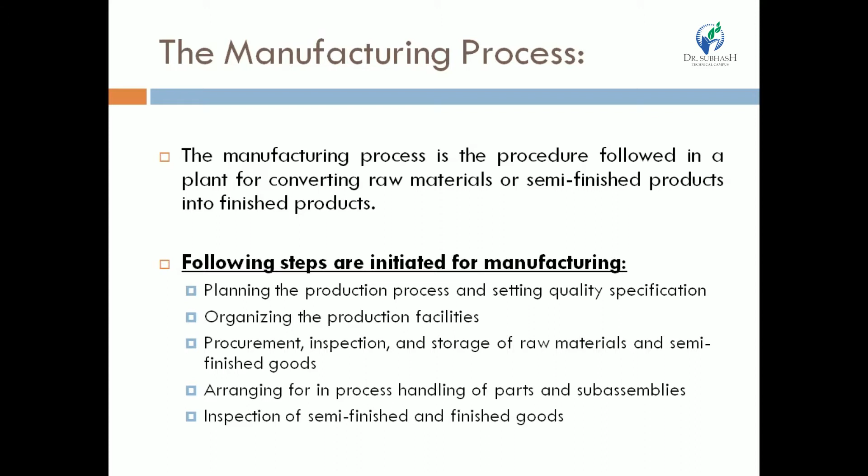Then arranging for in-process handling of parts and sub-assemblies or semi-finished products. We have to arrange and handle different parts, different assemblies, different semi-finished products, and use them to produce some product or job. Then inspection of the semi-finished and finished goods. These are the different steps which are initiated for the manufacturing.

Now see classification of the manufacturing processes, based on the function of the process. Based on the nature of work involved, this process may be divided into the following categories: which type of manufacturing process you want to use to manufacture the different product, depending on the type of work required and involved to produce that particular product.

First of all, we have to change the physical properties of the product, of the raw material. So this is one type of manufacturing process that we are performing to change the physical properties of the material.

Second one is the casting process. I hope you understand, or have studied previously, the casting process, which we are using to give shape and size to the workpiece.

Next is the primary metal working process. If you want to remove some metal or material from the workpiece or semi-finished product, then we are performing some metal working processes, called primary metal working processes. For example, if we have raw material as a round bar with diameter of 30 mm, and we want the actual job diameter of 20 mm, then we have to finish the raw material into the actual workpiece by removing some metal or material, which is known as primary metal working processes.

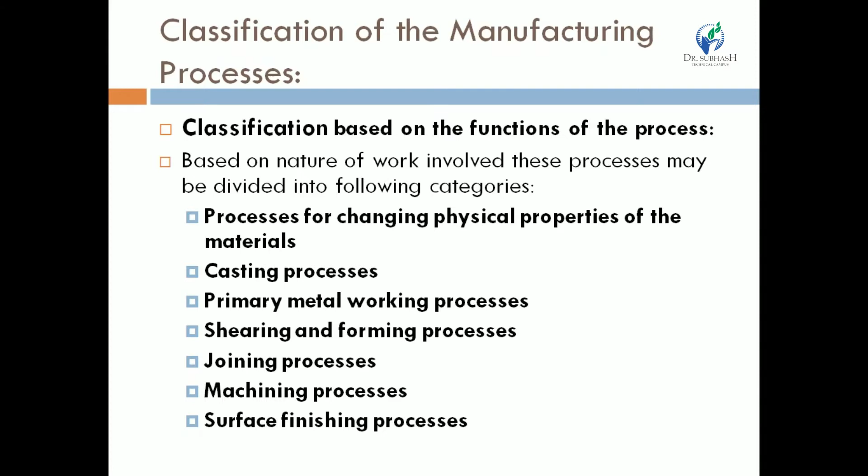Now, first of all, let us discuss process number 1: processes for changing the physical properties of the material.

Physical properties of the material can be changed by the heat treatment process. Heat treatment is one of the best methods for changing the properties of most metals. Metal, I am not talking about wood, I am talking about metal.

So these are the common heat treatment processes used in industries for changing the physical properties of the metal or materials. I hope all of you know about these heat treatments: hardening, tempering, annealing, and surface hardening.

Annealing we can further classify into 4 different categories: full annealing, normalizing, process annealing, and stress relief annealing. So these are the different heat treatment processes. As per the requirements, which type of metal or material you want to change the physical properties of, on that basis we select different types of heat treatment processes.

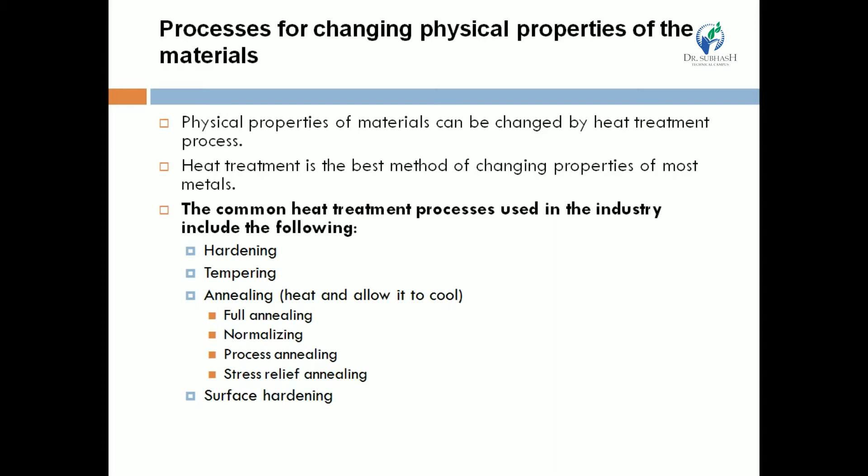Now, second process, that is casting. So what is casting? Casting or founding process involves the forming of objects by filling prepared molds with the molten material and allowing this material to solidify.

Depending upon the material to be cast, the number of castings to be produced, the size and intricacy of the casting, and the surface and dimensional accuracy desired, the casting process may be of any of the following kinds: sand casting, permanent mold casting, die casting, centrifugal casting, etc.

Precision casting includes plaster molding, investment casting, and shell molding. So we use a casting process for the purpose of filling prepared molds with molten material, which is also allowed to solidify in the casting process.

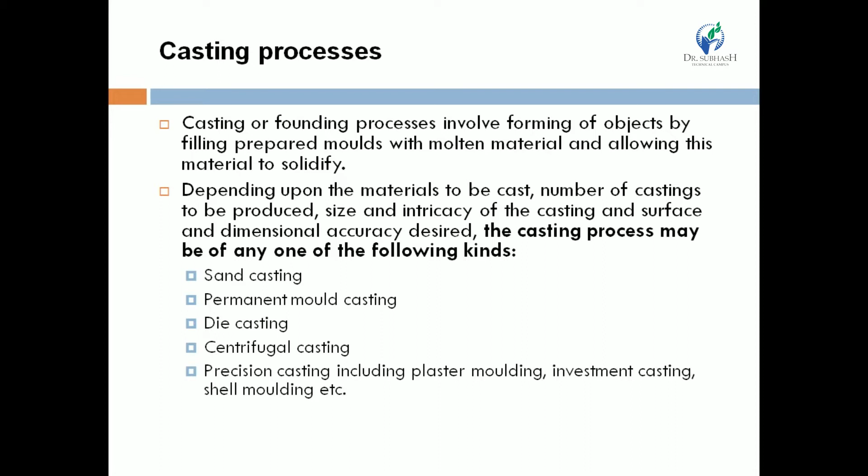So we can say that this type of process is used to give shape and size to the workpiece, depending on which type of work we want. So this is the casting process.

Now, primary metal working process, as we discussed in the first slide, this type of process produces what are known as wrought metals, which are important engineering materials because of their strength and toughness. Examples include structural I-beams, channels, angles, rails, tubes, pipes, etc.

Common primary metal working processes include metal rolling, cold drawing, pipe and tube manufacturing, forging, extrusion, etc. So before preparing the raw material for a particular product in industries, we have to perform this type of primary metal working process. Why?

To prepare the perfect raw material for the production of a particular product, job, workpiece, item, or component. Right? Primary metal working processes.

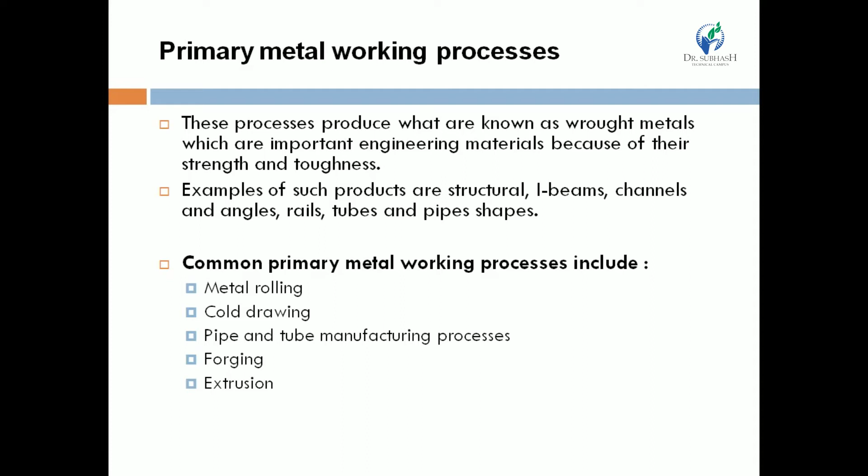Now, shearing and forming process. The machines and tools used in this process include shear, punch, die, presses, etc. The operations that make up this process may be classified as shearing, drawing, forming, stretching, etc. It is also one of the important portions of this manufacturing process.

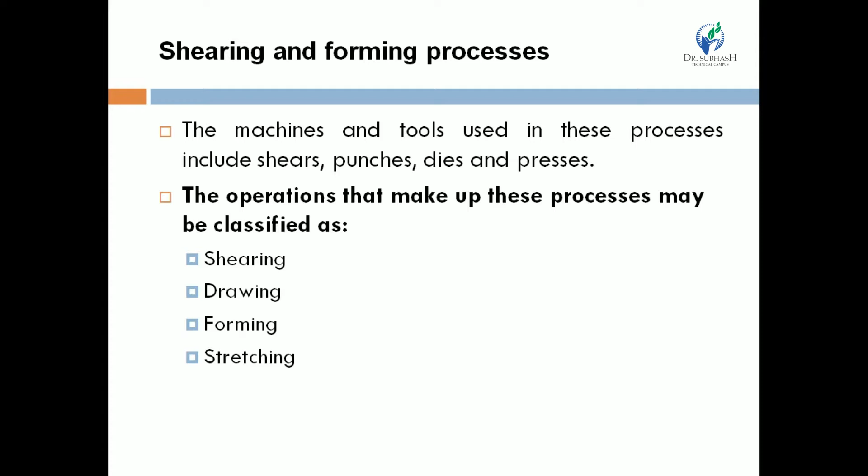Now, joining process, a very important manufacturing process, and in detail we will discuss it in chapter number 3. So joining process may be carried out for the fabrication of different equipment, for assembling components to make a functional unit, or for repair of broken parts.

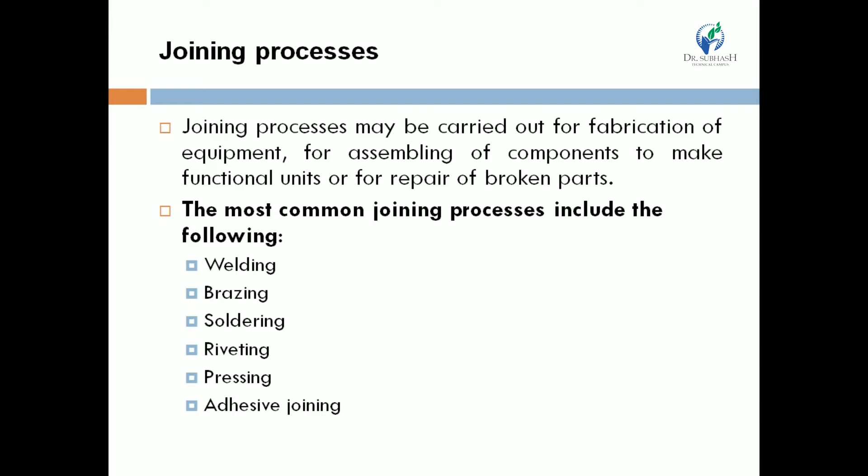So if you want to join broken parts again, then we have to perform different joining processes. The most common joining processes include the following, and I hope all of you have an idea regarding that: welding, brazing, soldering, riveting, pressing, and adhesive joining. These are the different joining processes.

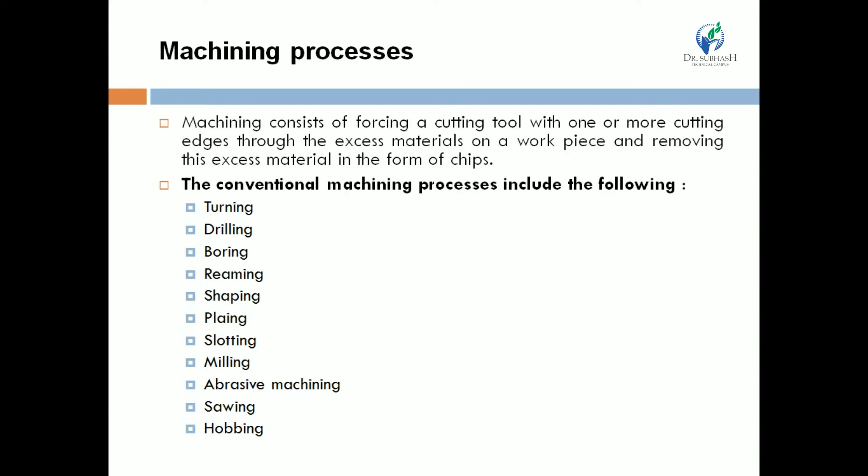The conventional machining processes include the following: turning, drilling, boring, reaming, shaping, planing, slotting, milling, abrasive machining, sawing, and hobbing. Many of these operations we already studied in manufacturing process. Now, surface finishing process.

As we discussed in the previous slide, this surface finishing process is very important, because after all other processes, we perform this surface finishing process. It is used to ensure a smooth surface, improve appearance, or provide a protective coating to the product.

So these are the listed finishing operations or surface finishing operations we can say. We can include polishing, honing, lapping, abrasive grinding, metal spraying, and electroplating, all these processes.

Abrasive grinding, that we perform in the manufacturing process with the use of the surface grinder or hand grinder, if you want to give good surface finishing with the use of these grinding operations.

Metal spraying, if we are spraying the metal on this particular product, then also we can give good surface finishing or shape and size.

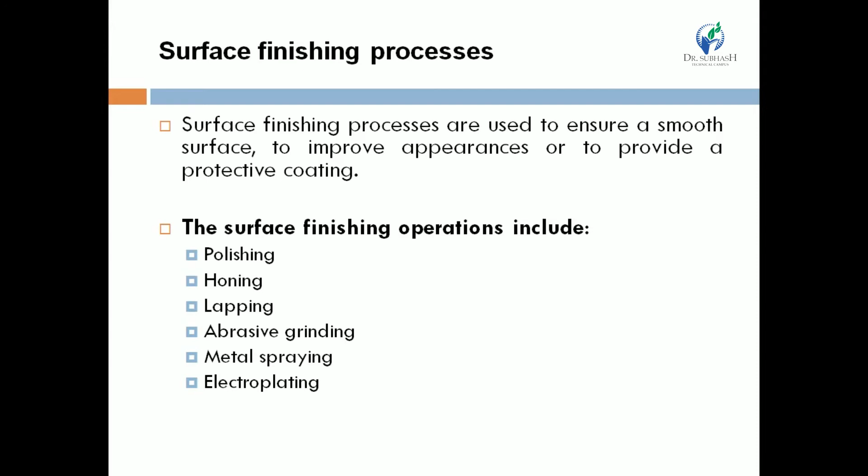Then classification of the manufacturing process on the basis of quantity of production. Based on the quantity to be produced, the manufacturing process can be divided into three categories.

Unit or piece production: if I want to produce only one piece of this particular product, item, component, or job, then it is called unit or piece production.

Batch or lot production: if I want to produce that particular product in some lots, a number of pieces, with the same material, same size, same shape, then it is called batch or lot production.

And the final one is mass production. If you want to produce that particular product or item in a large number of pieces, then it is called mass production.

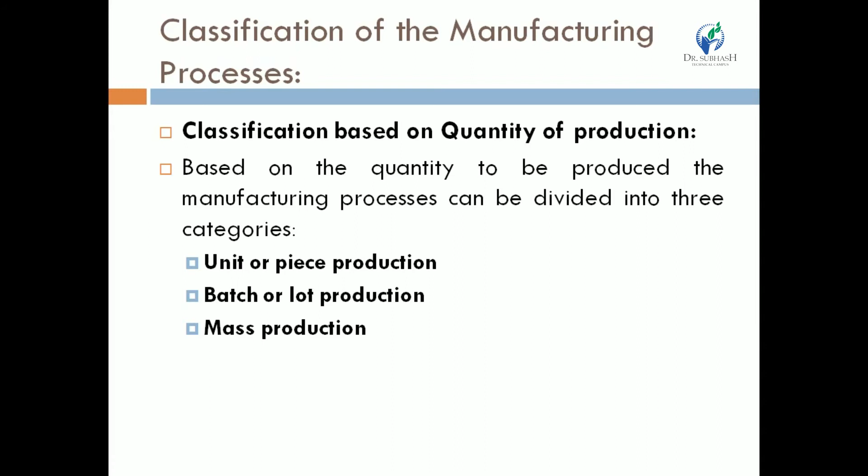Now some fundamental concepts. Interchangeability - what is interchangeability? The concept of interchangeability requires that each part or assembly going into the final product must be made to the definite size, shape and finish specifications. That is called interchangeability.

Simplification, standardization and specialization - this is also one of the most important concepts for the manufacturing process. If we want to produce some product or component, we have to find the way which is very simple, which also belongs to standardization. So the importance of the standard, and specialization.

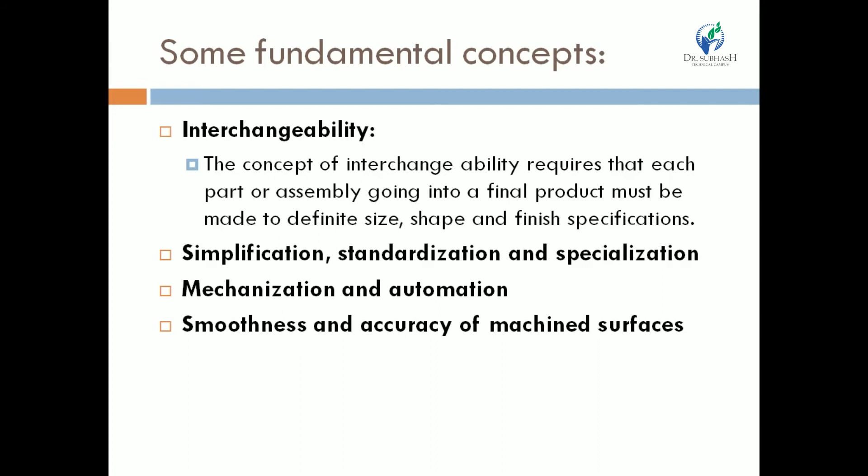Then mechanization and automation. What is mechanization? We are using mechanical energy manually. Automation means we can perform automatically. Smoothness and accuracy of the machined surfaces - that concept is also very important for manufacturing processes.

Now manufacturing cost - elements of the manufacturing cost. It has been pointed out earlier that in order to survive, every manufacturing organization must continuously strive to produce its product at the lowest cost and with a quality that meets the customer requirements.

So every organization is always thinking about how we can give the product to the customer at a cheaper price, and how we can satisfy the customer. What are the requirements of the customer in the current scenario? Which type of product do they want? On the basis of that, I select the different manufacturing process for this particular product.

The price paid by the customer for a commodity, called its selling price, is made up of several costs. These are generally grouped under three categories: cost of production or manufacturing cost, cost of distribution or sales expense, and the third one is profit, right?

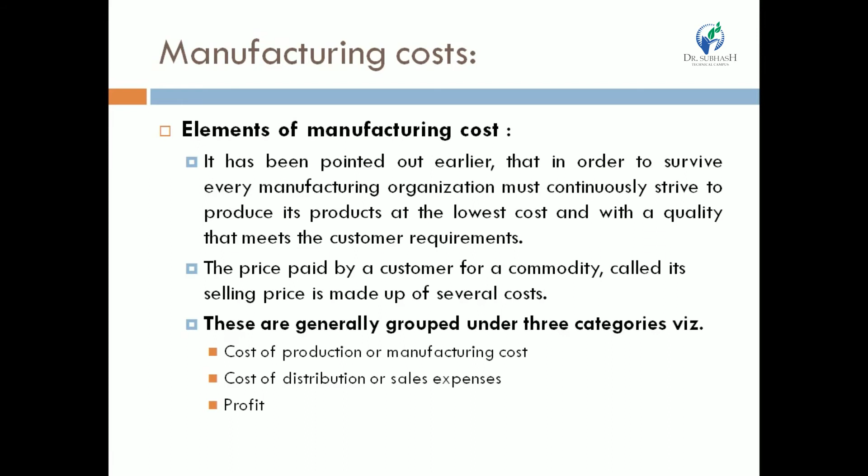So first, fixed and variable cost. What is fixed and what is variable? Another classification of cost is in terms of fixed and variable cost. Fixed costs are those costs which are independent of the quantity of product manufactured, and the total cost of a product is fixed cost plus variable cost. So what is fixed?

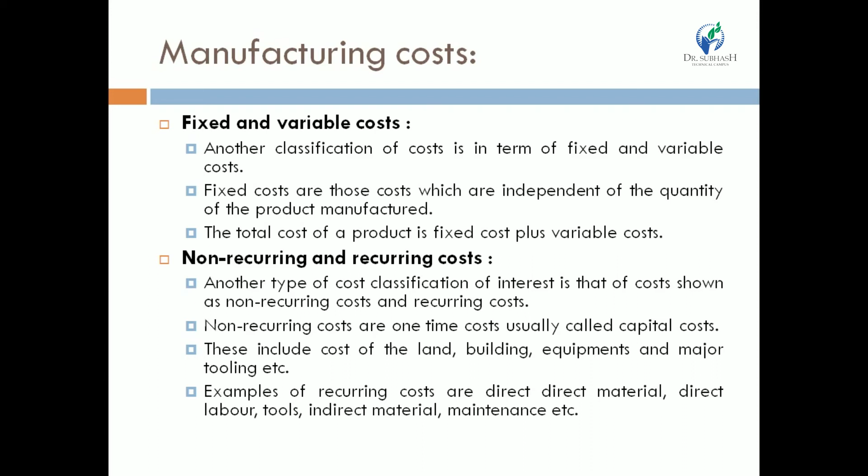Recurring, non-recurring. Which is non-recurring? Land cost, building cost, equipment cost, major tooling, etc. What is recurring? Material, labors, tools, indirect materials, maintenance, etc.

Incremental cost. The incremental analysis requires that the outcome of the alternative course of action be estimated in terms of the change in revenue in comparison to change the cost. The use of this incremental analysis requires the outcome of the alternative courses of action be estimated in terms of the change in revenue, right?

Then importance of cost estimation. Cost estimation is the process of estimating the total expense likely to be incurred in manufacturing a product and hence its likely sale price.

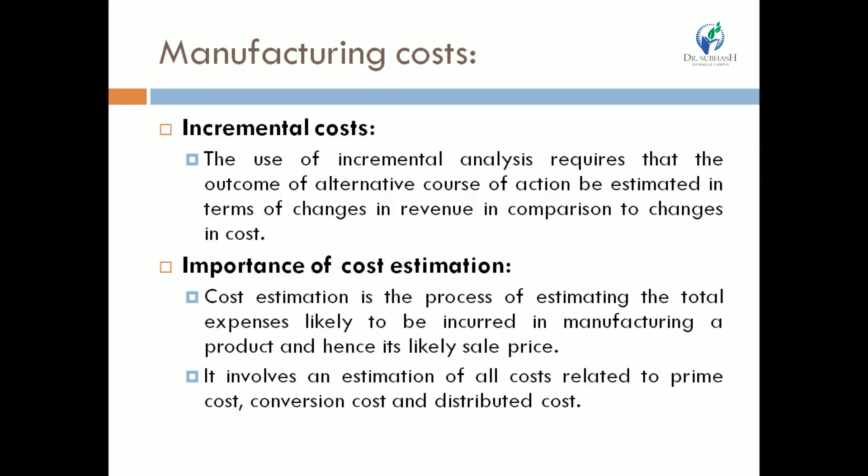So if you are producing some product with the use of different manufacturing processes, then first of all we have to estimate it. So what is the cost of the raw material? What is the cost of the different manufacturing processes? What is the maintenance cost? Different costs that we have to calculate before starting the manufacturing process. And then we have to decide likely sell price for this particular product. So it involves an estimation of all costs related to the prime cost, conversion cost and distribution cost.

Now selection of the manufacturing processes. The selection of the manufacturing processes to be used for any product calls for a balanced consideration of all the factors discussed so far. Specifically, the selection of the process is based on the following factors. So how are we selecting the different manufacturing processes?

First of all, the function of the process. Second one, the material of the product - which type of material we require for this particular production, right? Shape and complexity of the job. If you want to produce a job with complexity, so shape and complexity of the job is also an important criteria for the selection of the manufacturing process.

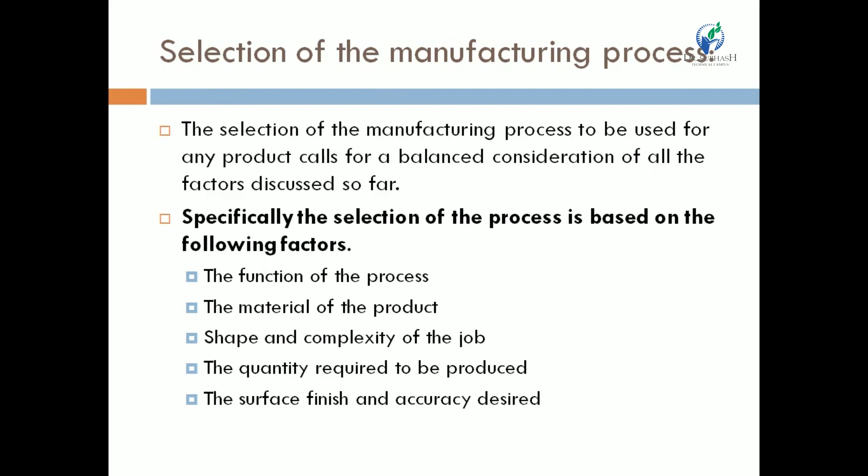The quantity required to be produced - piece production, lot production, mass production. The surface finish and accuracy desired - surface finishing process, and which type of accuracy we require.

So first, function of the process. What is function of the process? A manufacturing process may be required to produce a given shape or size, produce desired form, or change the physical properties or generate a required finish or accuracy. It is the function of process.

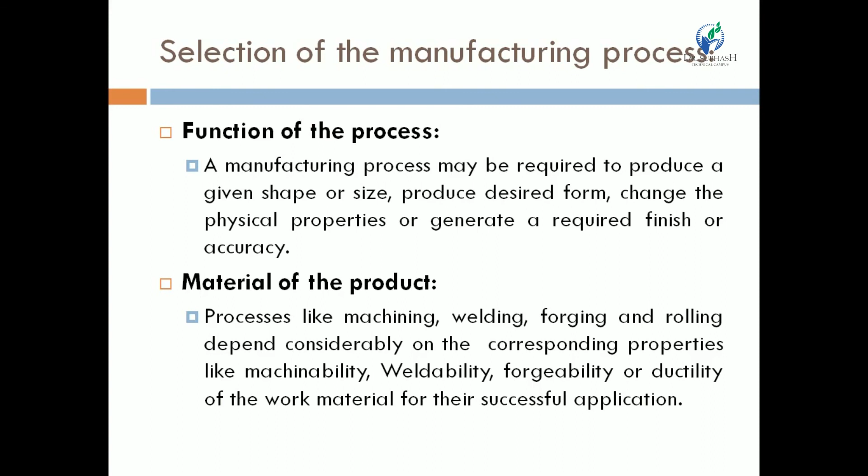Material of the product. Processes like machining, welding, forging, rolling depend considerably on the corresponding properties like machinability, weldability, forgeability, ductility of the work material for their successful applications. It is material of the product.

Now, shape and complexity of the job. The shape and complexity of the workpiece may call for the use of a particular process. So the microstructure of the material as received and likely changes that can occur during the process are necessary to be considered in deciding the deformation possible at each stage of the manufacturing process, and the number of stages required and hence the process time.

Next is quantity required to be produced - lot production, batch production, mass production, or piece production, right? The quantity of the job to be produced is important in deciding the type of tooling and equipment that can be used for any process. And the cost of such tooling and equipments cannot be justified if quantity to be produced is low.

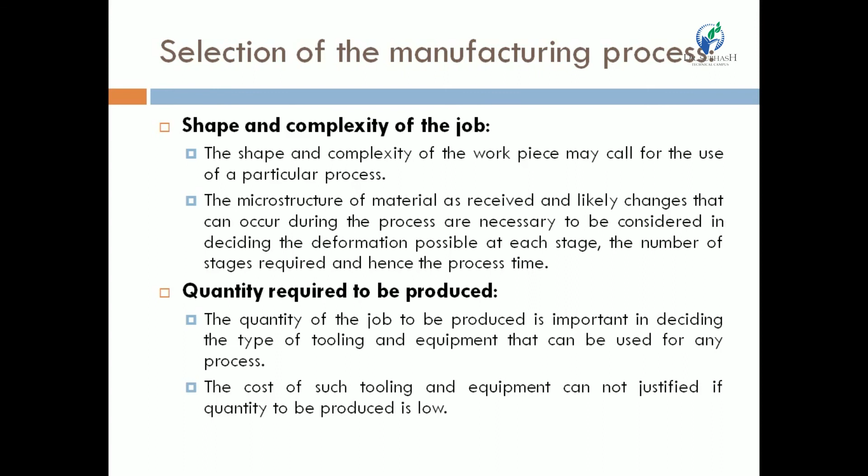Surface finish and accuracy desired. Surface finish and accuracy becomes an important consideration when manufacturing components that have to be assembled with other components, or for production of sophisticated machinery, quality control equipments, measuring instruments and gauges. So surface finish also improves the aesthetics of the component and enhances its sales appeal. Surface finishing processes, or the importance of surface finishing processes for these manufacturing processes.

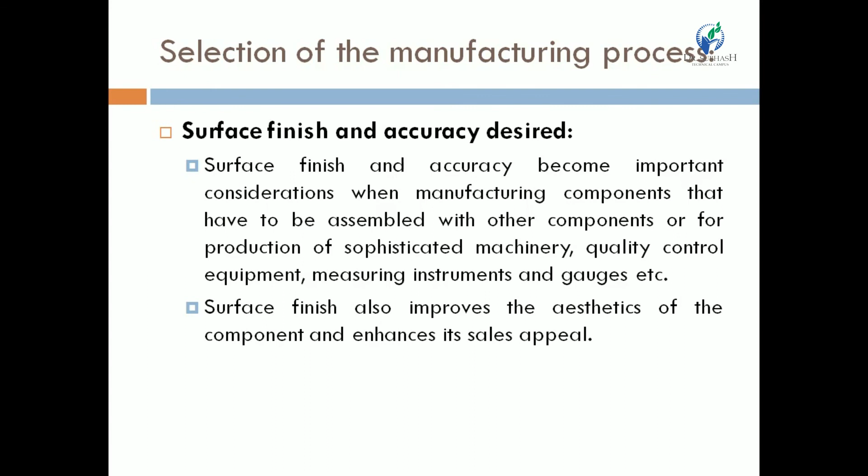Thank you. Chapter number 1, manufacturing technology, is over now. From the next lecture we will start another chapter. Thank you all.